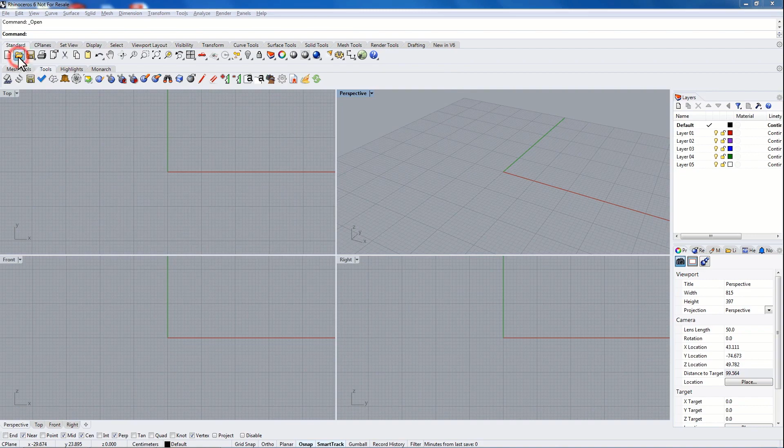ExactFlat is capable of reading many different geometry types. For this video we are going to import a step file that was originally created in SolidWorks. We will begin by clicking the Open button and selecting our headrest model, then clicking the Open icon to open the model. We're going to accept the default options and just click OK.

The first thing we notice about the model is that it's coming in upside down. If we rotate the perspective view around, we can see that the headrest is upside down. To correct this, we can use either the mirror command or the rotate command.

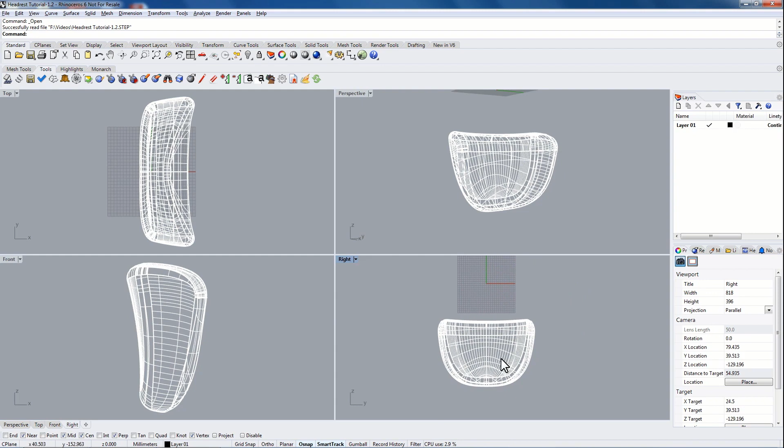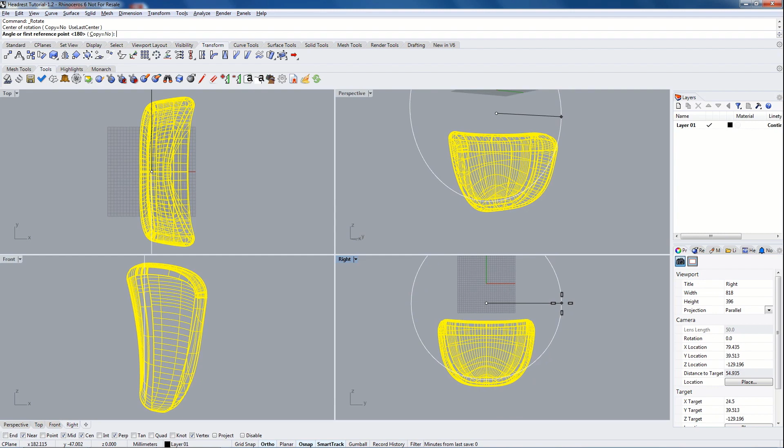We will start by selecting the mesh. We're going to go to the transform toolbar and use the rotate command to rotate this to the correct orientation. We will click an arbitrary spot for our center of rotation, and our first reference angle is going to be the horizontal x-axis. We will hold shift on the keyboard to snap our second selection point to be on the horizontal x-axis. We will rotate our second reference angle 180 degrees, and again holding shift we will snap our second point to the horizontal x-axis. Our object has now been rotated to the correct orientation.

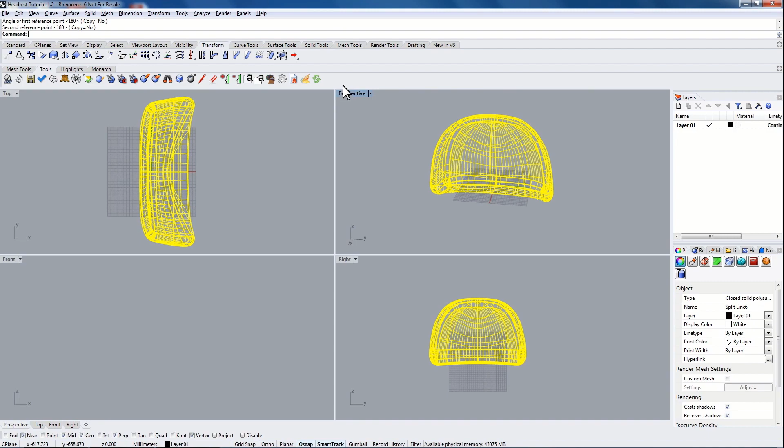We will now proceed by maximizing the perspective viewport. We will do this by double-clicking the viewport title in the top corner here. Now our viewport has been maximized, giving us the greatest viewing area for working with our model.

Our next step is we're just going to zoom to extents so we can see as much of our model as possible.

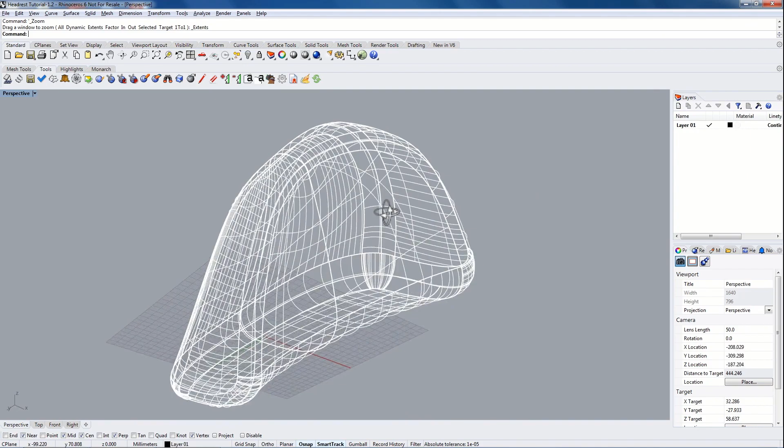Before we proceed, trying to work with this object in wireframe mode is a little difficult, and it doesn't give us a very good sense of the curvature of the object. So we're going to change our viewing mode from wireframe. We're going to right click on the viewport title to bring up our menu, and we're going to change our render mode from wireframe to shaded. This allows us to see the curvature of the model a little better.

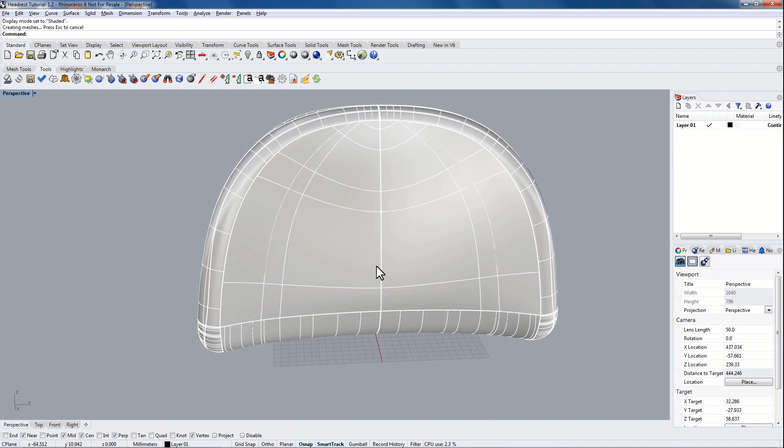Now when this model came in, it came in as a single polysurface object. Although ExactFlat is perfectly capable of flattening polysurface and surface objects, it is preferable to flatten a mesh object. This is because meshes give us the greatest degree of control and access to our suite of pre-processing tools, such as the adaptive and uniform remesher.

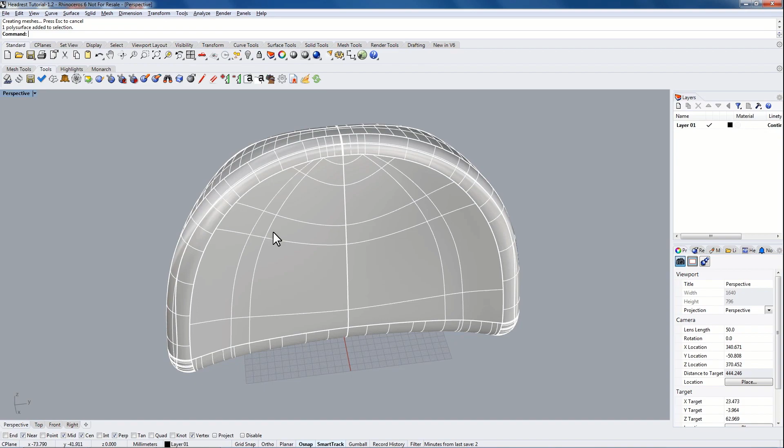As such, we're going to first create a mesh from this object. We will begin by selecting the object, then go to our Mesh Tools toolbar and use the Mesh command to create a mesh. For simplicity's sake, we're going to use simple controls and just create the most polygons possible. When done, we'll click OK, and soon we have a mesh.

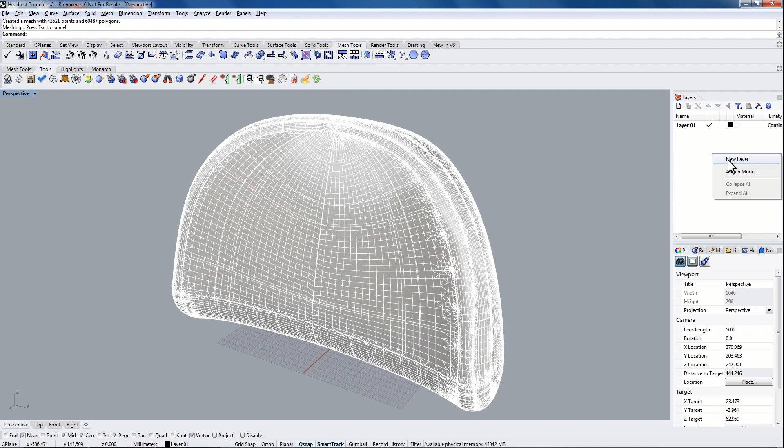To keep the model document clean, we're going to separate all the different geometry onto different layers. Instead of keeping our geometry in one layer, we're going to create a new layer. We'll do this by going to the Layers tab, right clicking in the white space, and selecting New Layer. We're going to give our layer a name of Mesh.

Next, we're going to select our mesh, and using the Object Properties dialog, we're going to change the layer from Layer 1 to Mesh. We are also going to change the display color from white to by layer, so that the mesh inherits the color of the layer and not just a white mesh.

Now we can make the Mesh layer the default layer by adding a check mark beside the layer name, and we can click the light bulb icon to turn off the polysurface layer.

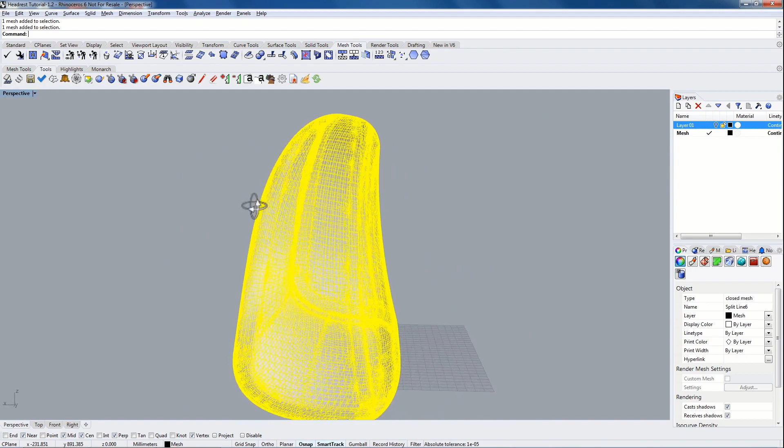At this point we have one single mesh representing all pieces. For this flattening job, we're going to create 4 different pattern pieces out of this mesh.

So we will begin by first exploding the mesh. To do this, we can use the Rhino explode command, or we can just type explode into the command line. So we will type in explode to explode this mesh, and it has exploded into 34 different meshes.

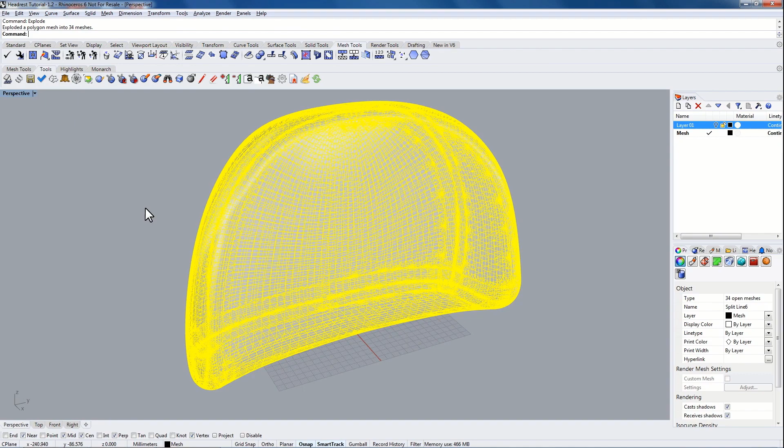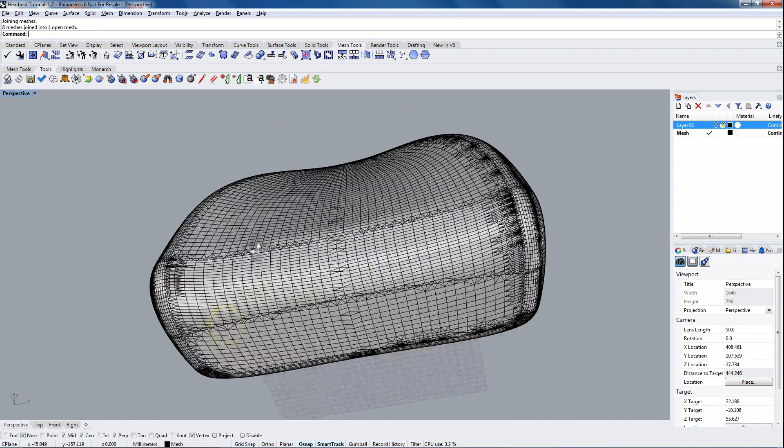From here, we can start to form logical pattern pieces by simply selecting them using the mouse. By holding shift, I can select multiple pieces, multiple meshes at the same time, and then we're just going to use the Rhino join command. So I will type join into the command line and press enter to join the meshes. We will repeat this process for all desired pieces.

So I've selected all my faces, and now I'm going to type join into the command line to join them together. We will repeat the process for the back. By holding shift, I can select multiple meshes and then type join into the command line to join them together.

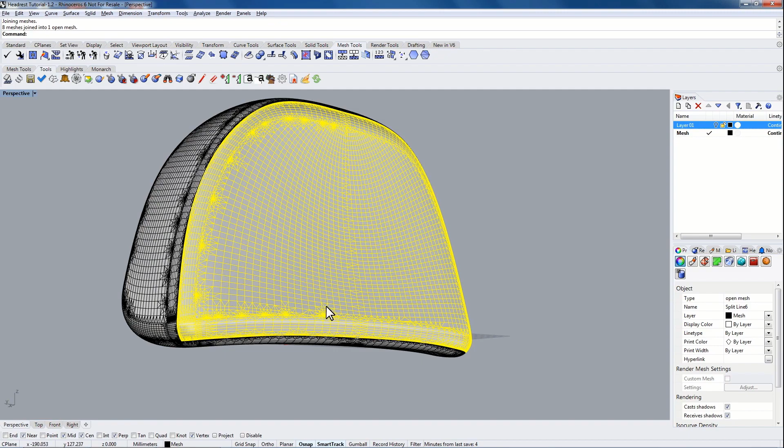For the last piece, instead of selecting all the faces, I'm going to select the 3 faces that I have already joined. Now I'm going to type invert into the command line to invert my selection. And now I can type in join to join these faces together.

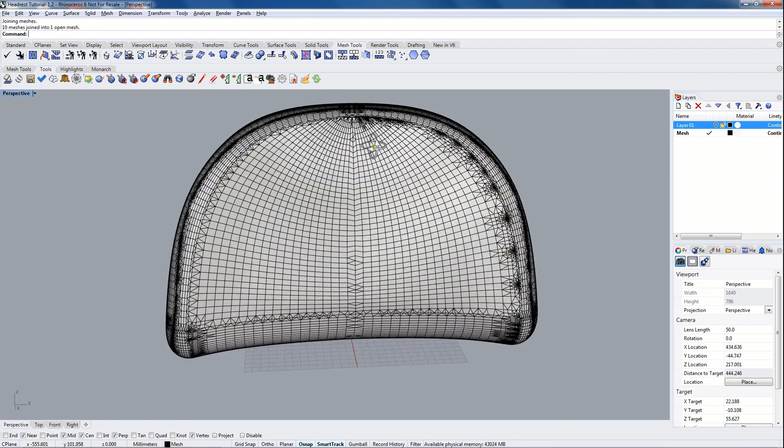By joining these faces together, we have created a single mesh that is comprised of many different sub-meshes. If we were to flatten this with ExactFlat, ExactFlat would recognize the sub-meshes and it would explode them for us back into our component meshes.

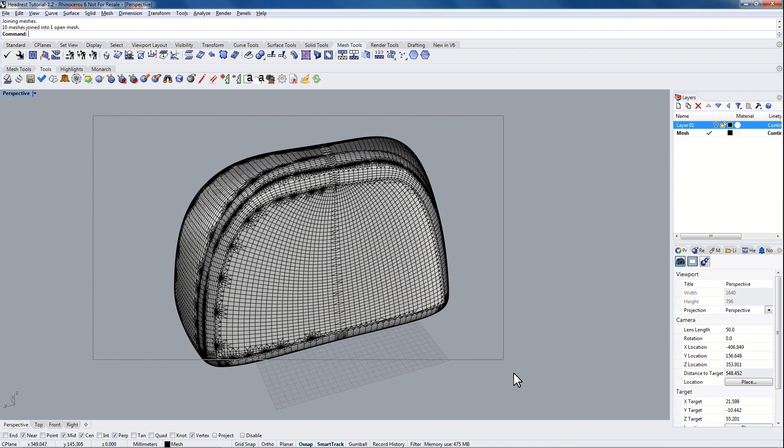To prevent this from happening, we are going to use the weld command to weld all the vertices together, basically reducing the coincident vertex count to 0. So we will start by selecting all our meshes and type in weld into the command line to weld them together. We're going to use a weld tolerance of 180 degrees, and pressing enter finishes the command. Now we have 4 mesh objects that we will flatten with ExactFlat.

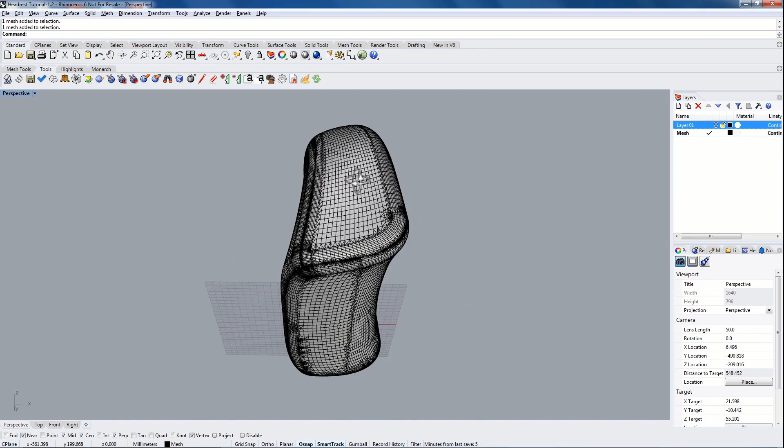Before we flatten with ExactFlat, we're going to use ExactFlat's mesh preprocessing tools to reduce the number of vertices of this mesh. As we look at the mesh, we can see we have a wide variety of triangle and quad sizes, ranging from fairly large.

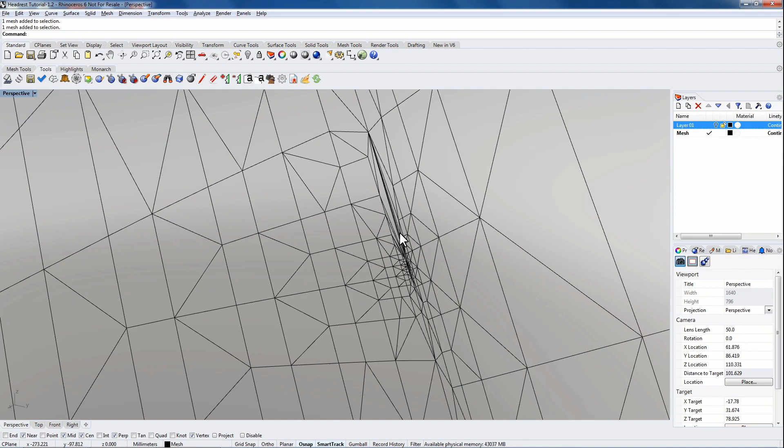If we zoom in, we can see some very, very small triangles here. We can also see what are referred to as high aspect ratio triangles, and these are triangles that have very small angles at one end, mixed with very large angles at another vertex.

Although ExactFlat can flatten these, they're not ideal for ExactFlat, and as such we have a couple different tools for pre-processing and conditioning these meshes, the most important of which is our adaptive remesher.

So we will select all our meshes and click the adaptive remesher icon to start the adaptive remesher. The adaptive remesher will automatically compute reasonable tolerances for sewing tolerance, desired surface, boundary, and minimum edge length, as well as use the most appropriate options.

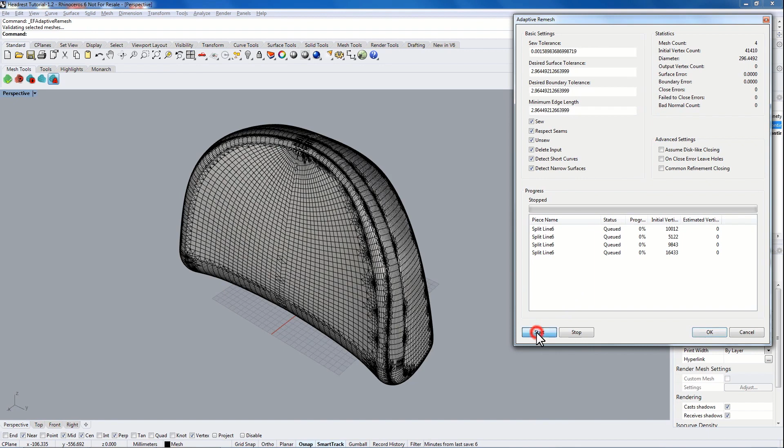So we're going to simply click the start button, and very soon we're going to start to see a new mesh created over top of the original. We're going to click yes to the high vertex count. We've got a high vertex count over 10,000 vertices, which is acceptable for ExactFlat when using the adaptive remesher. And very soon we're going to see a new mesh being created over top of the original.

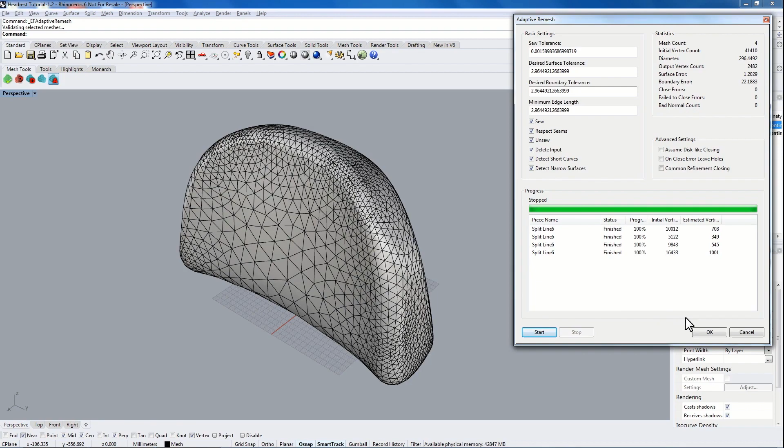A couple of the characteristics of this mesh are that all the triangles are more or less equilateral, and when there is a change in size of triangle, the change occurs gradually over a large distance.

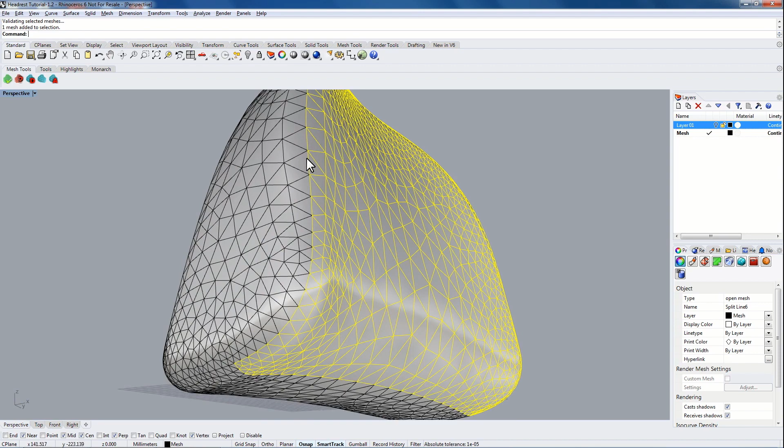We can also see that the edge tessellation has been preserved, so as we look at seams we can see that both sides of the seam share the same tessellation, that is, there's a single set of vertices along the edge that both right and left hand side share. All of these characteristics of the mesh make this a very suitable mesh for ExactFlat to flatten.

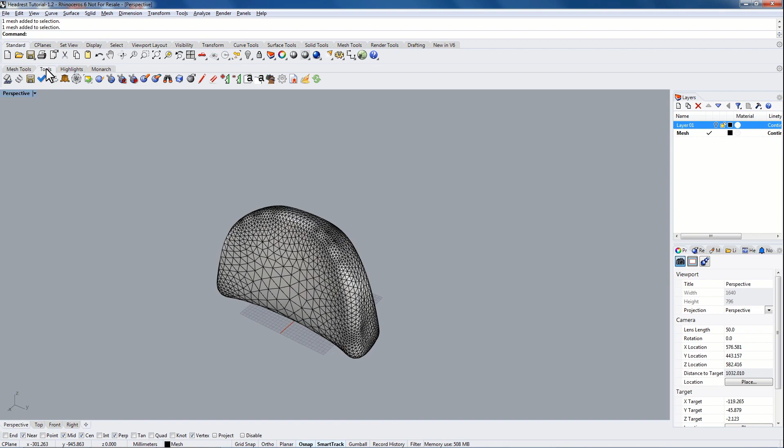After we've finished remeshing, we will change over to the ExactFlat toolbar and we will start to flatten these using the flatten command. We'll simply rectangle select all the meshes and press enter on the keyboard to accept the selection. And very quickly we can see our flat pattern.

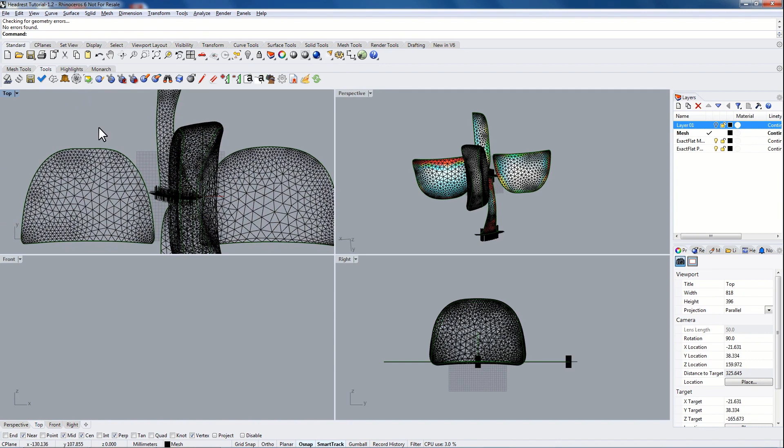For our next step, we're going to minimize the perspective viewport by clicking on the perspective title, and we are going to maximize our top viewport by double clicking on the top viewport title. We're going to switch from wireframe mode by right clicking on the top viewport title and selecting shaded.

And now, after flattening, we have 2 new layers created. One is the ExactFlat model layer, and the other is the ExactFlat pattern layer. We are going to make the pattern layer our active layer, and we are going to turn off the model and the mesh layer.

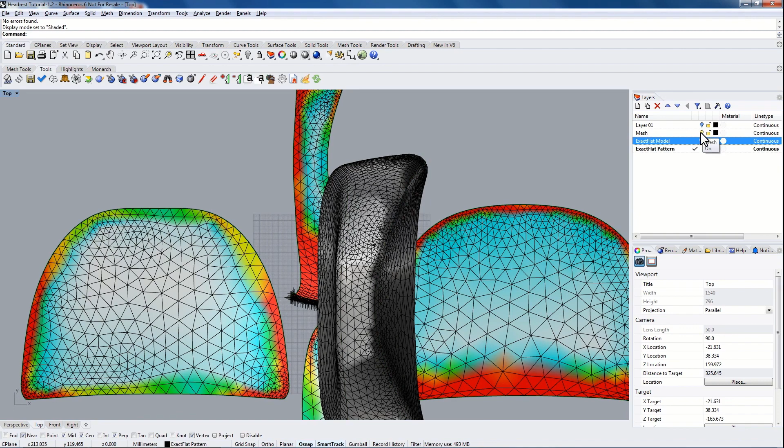It's important to note that ExactFlat is a 2-stage flattener, meaning ExactFlat does its flattening in 2 steps. The first step is what we are looking at now, and these are flattened using what are called pre-flatteners. Our pre-flatteners are a collection of different mesh flatteners that are very quick, but they produce meshes that are not optimized.

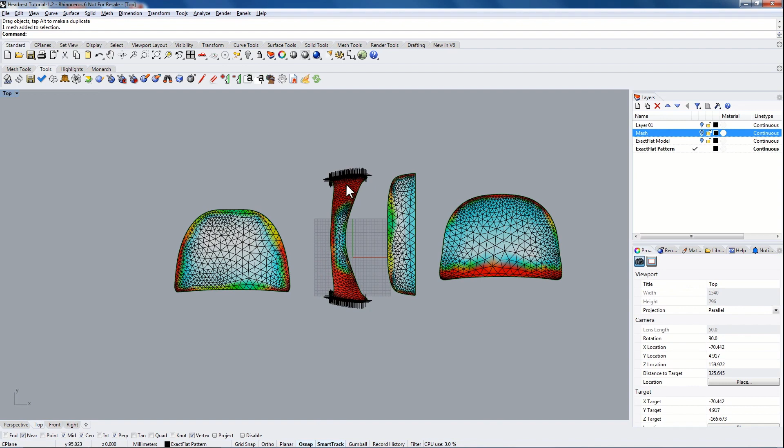In the case of this one, we have quite a bit of strain around the perimeter. For this piece here, we have quite a bit of strain, and the mesh is folded in on itself. This is the result of a projection flattening, and we have very similar results for the remaining meshes as well.

ExactFlat has a number of pre-flatteners, including our fracture pre-flattener, our pelt pre-flattener, and a collection of convex combination map pre-flatteners, as well as a number of pre-flatteners that are not actually featured in our toolbar yet.

If we select the fracture pre-flattener, we can select any edge on a mesh to act as a starting point for a new fracture. We can see the results of this fracture have both reduced the strain on the surface as well as expanded the pattern perimeter and eliminated a lot of the strain on this piece.

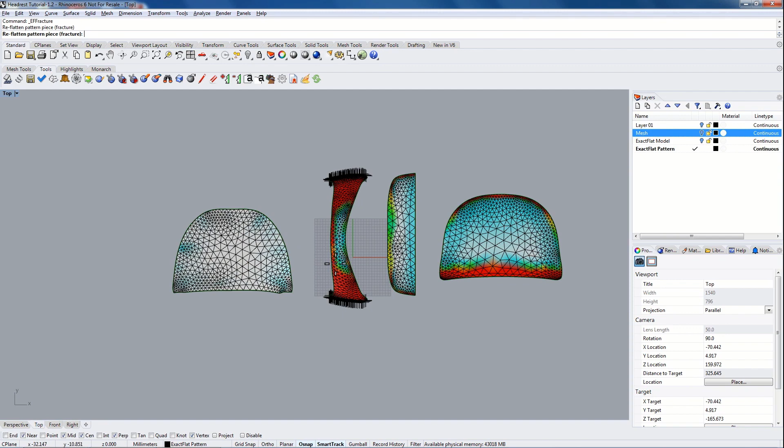When used on the second piece here, we can see that we've eliminated the vast majority of the strain. However, if we look at the corner over here, we can see a cross highlight which indicates the presence of flipped triangles or folds or wrinkles in the pattern. We'll use the fracture command on the remaining pieces, and our primary goal here is to eliminate a lot of the excess strain that's in the pattern.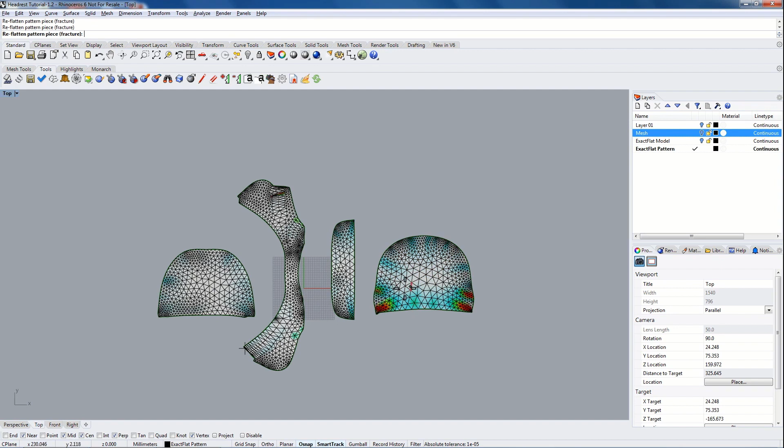We can try the pelt command on some of the pieces, and we can see that we end up with a slightly different starting pattern, although it is still unoptimized. In the case of this piece, we get a better starting position without flipped triangles, but this starting point has more strain in it.

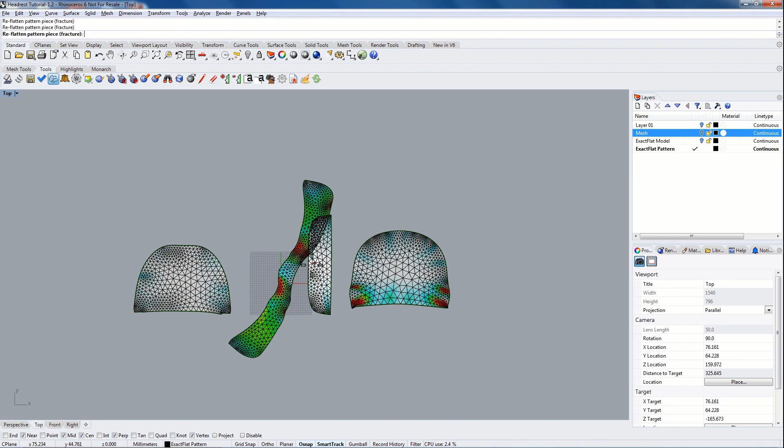The important thing to understand is that any of the pre-flatteners can be used at any point in time, and you can use them as many times as you want. This is just a result of the first stage flattening, and the second stage is always going to be optimized, and the optimizer is what's going to give us our final flat pattern.

The goals of using the pre-flatteners are to achieve a decent starting point for the optimizer that has minimal strain, such as this piece, and no flipped triangles. In the case of this piece, we can't optimize this piece yet because it has a flipped triangle.

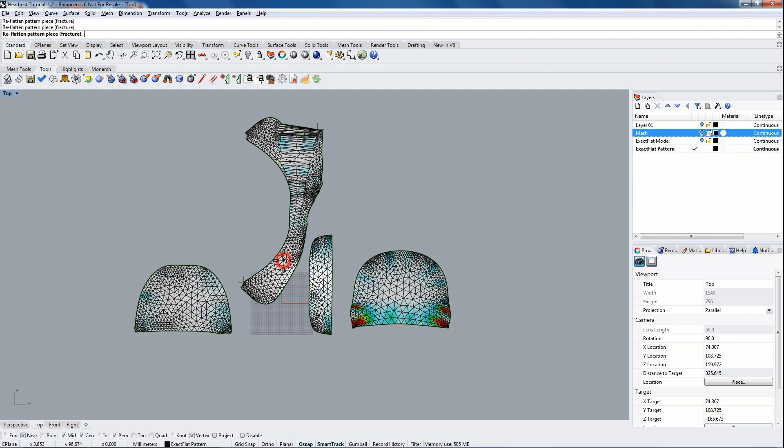The best way to correct flipped triangles are to either try a different pre-flattener, or in the case of fracture, we can try fracturing from different starting locations, and depending on the starting location, we end up with a different initial flat pattern that may or may not have flipped triangles. We can also try using ExactFlat's automated flip triangle removal process to remove the flipped triangles for us. And in this case, the process was successful and we no longer have any flipped triangles on this pattern piece.

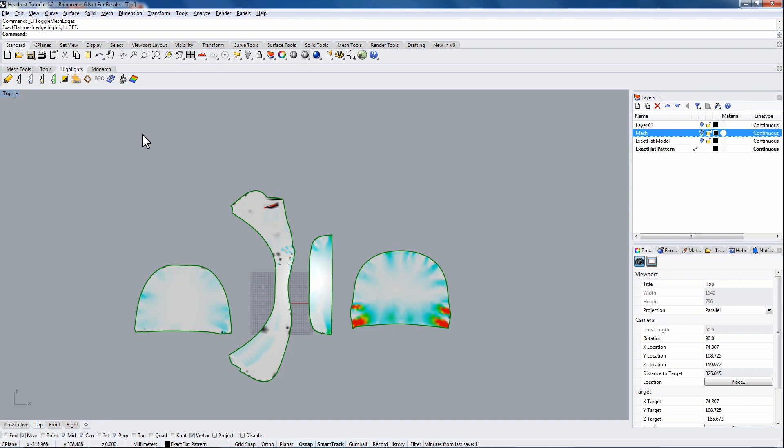It may be beneficial to turn off the ExactFlat edge highlight, and this will remove the triangulated mesh from the pattern piece, and we may also turn off the strain analysis. In the case of rendered textured objects, turning off the strain analysis will also allow us to see the texture of the object when in rendered mode. If the strain analysis is turned on, even if we are in rendered mode, we will only see the strain highlight. We will turn our strain highlight and edge highlight back on and go back to the tools toolbar.

Once we have a decent starting point for our flat patterns, we will use the ExactFlat optimizer to reduce strain and sag to as close to zero as possible.

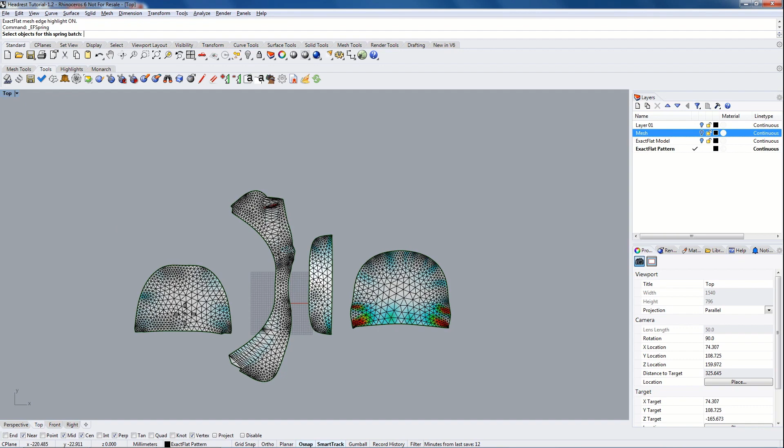For this demo, we're going to use a simple cotton model, and we're going to turn preprocess on to reduce our optimization time. Very quickly, the optimizer starts minimizing strain and sag and optimizing the pattern piece.

As the optimizer runs, we can see the shape is changing to better fit over top of the original 3D model. You can also see the strain highlight changing, indicating the strain throughout the pattern piece is changing. For most pattern pieces, this shift is going to be from red and green colors down towards white and cyan.

As with most parts of ExactFlat, the strain legend is very configurable through the ExactFlat options panel. By default, the strain analysis is configured so white represents 0% strain, cyan is about 5% strain, green is 10% strain, yellow is 15%, and red is 20% or more.

If at any point in time the optimizer reaches a point where the pattern is good enough and you just want to continue, we can click either the skip button to skip the current piece, or we can click the stop button to stop optimizing altogether. In this case, we click the skip button to skip optimizing this piece so we can proceed on to the next pieces.

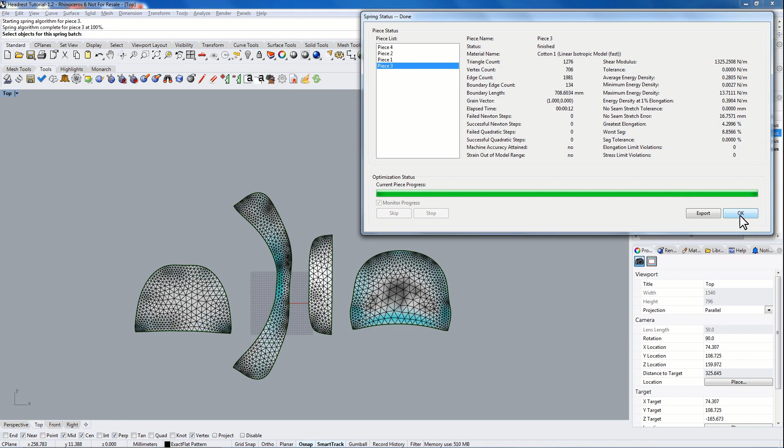After the optimization is complete, we can click the OK button to close the spring status dialog. And now we are ready to do our patterning of these pattern pieces.

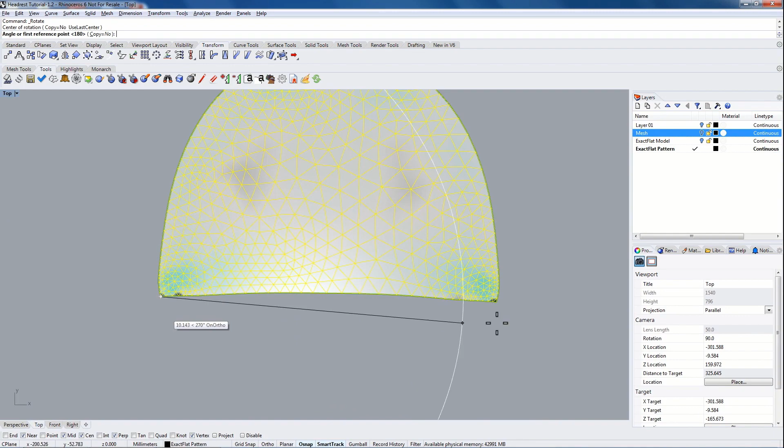To begin, we're going to rotate this pattern piece so the bottom edge is perfectly horizontal. And to do this, we will again use the Rhino rotate command. So we'll click the rotate icon in the toolbar. We're going to select the bottom edge as our center of rotation. We will select the other corner as our first reference point, and just holding the Shift key on the keyboard, we're going to snap this to the horizontal x-axis.

We are now going to use the ExactFlat Find command by clicking the binoculars icon in the ExactFlat Tools toolbar, and we're going to set a find offset of about 20 millimeters.

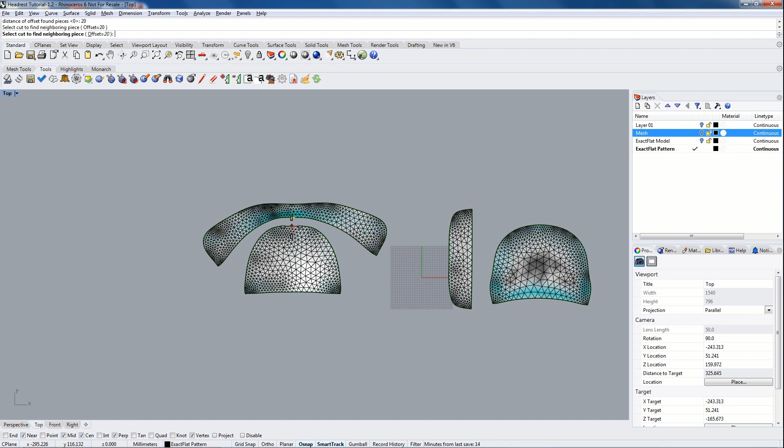As we click on edges and highlight over one of the edges, we can see the neighboring edges also being highlighted on the piece to the right. When we click on an edge, we see our neighboring piece is automatically translated and rotated to match the orientation of the selected edge.

Using this tool, we can very quickly rearrange the pattern pieces so they are much easier to work with in ExactFlat. This allows us to easily place notches on our pattern pieces, as well as identify any meshing or flattening errors that have occurred. Our next step is to add notches to the pattern, and notches are a combination of a text tag as well as either a slit notch or a V-notch.

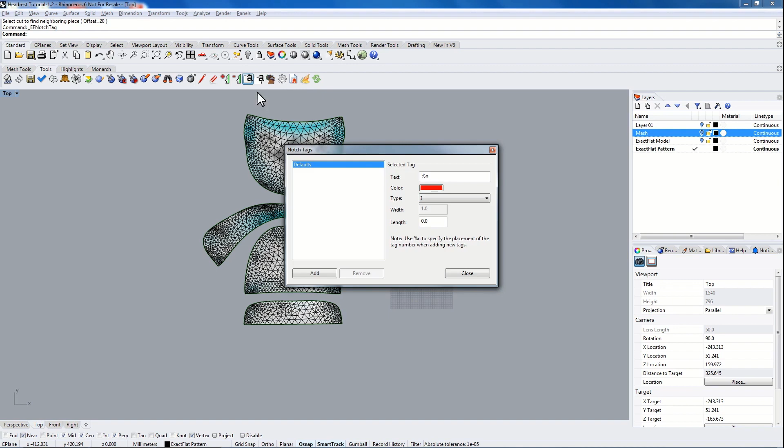Notches can be configured. We can change the color of the notch, change the type of the notch between I and V notch, and we can also manually adjust the width and length of the notch.

When the length is set to 0, the length is going to automatically be the length of the seam allowance added to our pattern piece. If we manually specify the length, then the length is always going to be however many units entered in the unit system that the document is currently using.

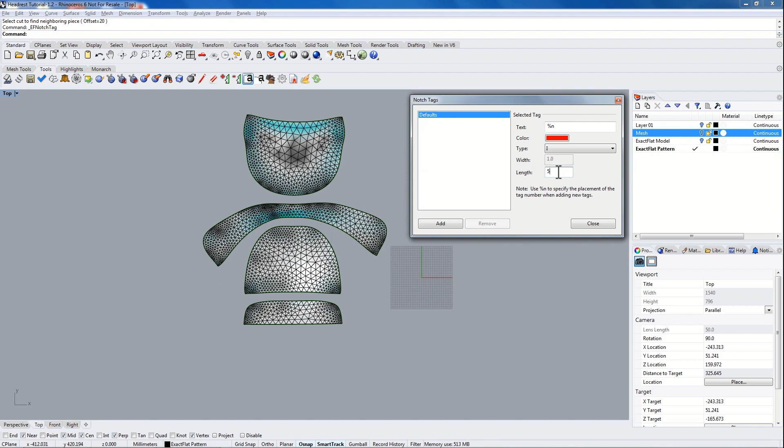In this case, we're going to specify our slit notch to be 5 millimeters in length. We'll click the Add button to start adding notches to this part. As I select edges on the pattern piece, we can see that the notches are showing up on the neighboring pattern piece as well.

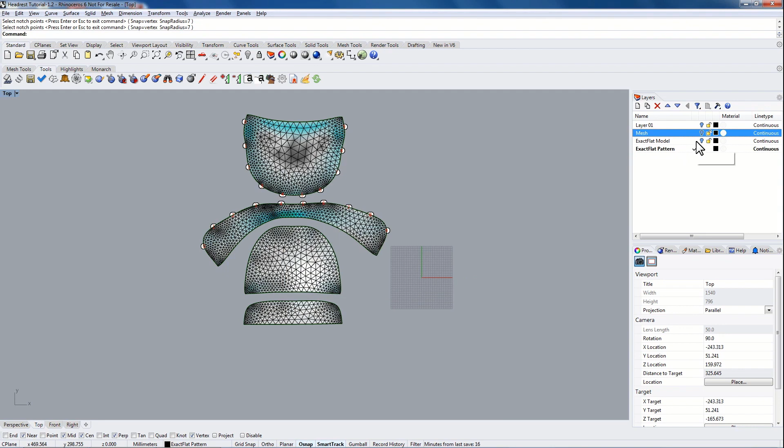We can also add notches to the reference model by simply switching back to our model layer. We'll make the model layer the active layer, hide the pattern, and minimize the top viewport by double-clicking on the top label. We'll maximize the perspective viewport by double-clicking on perspective, and now we can rotate our model around and start adding notches to the 3D model.

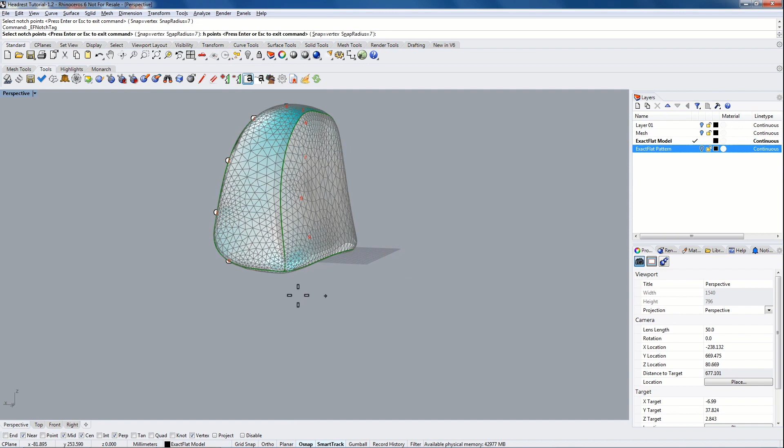We will again open up our notch tag dialog, and we'll click Add to start adding notches again. As we select our edges, we can see that our notches are showing up where we select. If we were to view our pattern again, we would see that the notches are being added to the pattern as well as the 3D model.

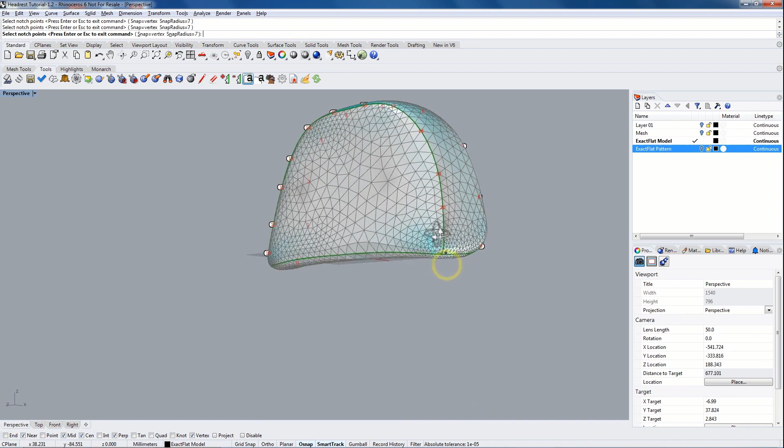The 3D reference model always represents the exact same changes made to the pattern and vice versa. So any change made to the model will be represented in the pattern, and any change made to the pattern will also show up on the 3D reference model.

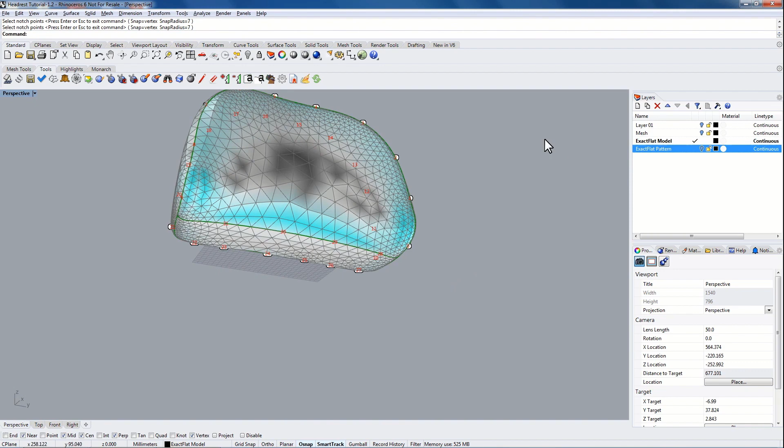Once all our notches have been added, we are ready to start creating a DXF. To do this, we will click the DXF icon in the ExactFlat Tools toolbar, and we will specify a DXF name.

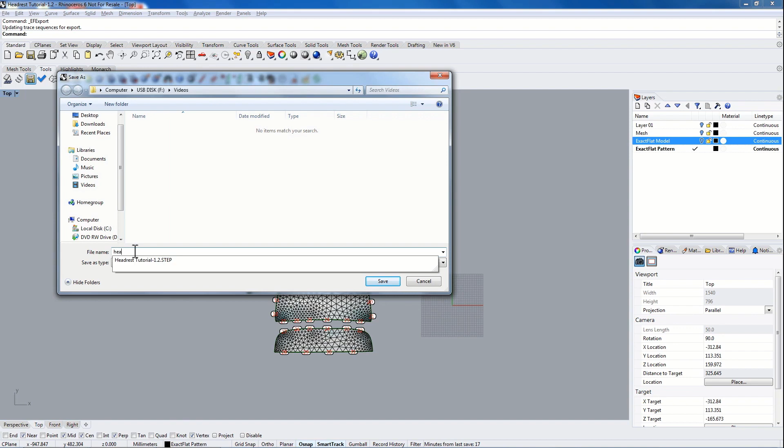We can use the import command to import the DXF back into the current document so we can have a look at the structure of the DXF.

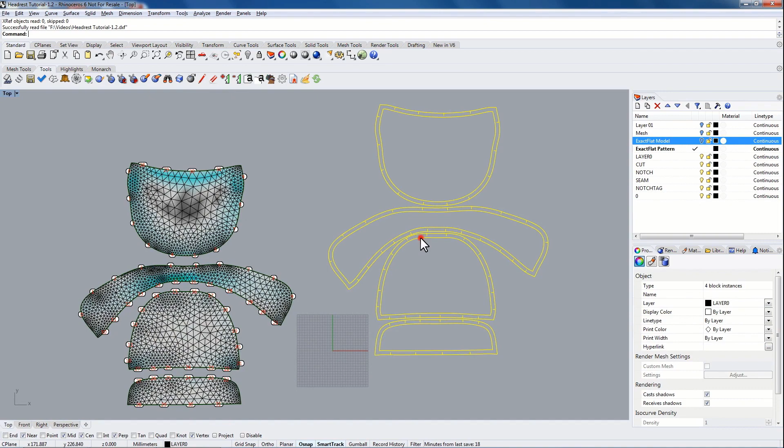As we zoom in, we can see that all the notches have been created where we specified them. We can also see that each notch has a tag added to it.

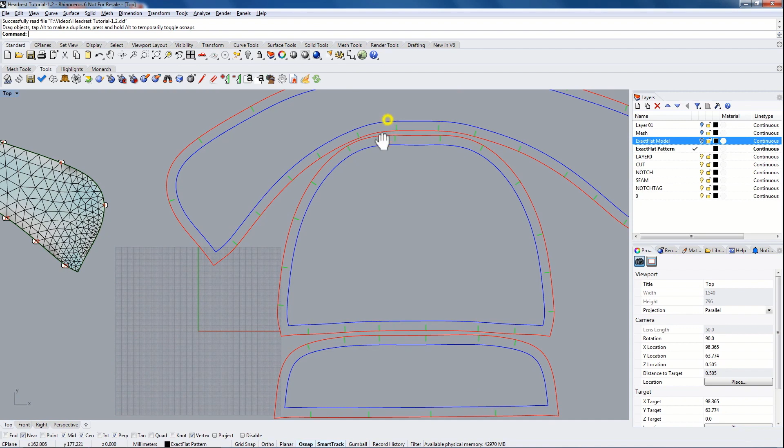When we start looking at the structure of the pattern, we can see we have a blue seam line, which represents the perimeter of the pattern piece, as well as a red cut line, which is the pattern piece plus an optional seam allowance.

The optional seam allowance is configured in the ExactFlat Options panel. If we move this pattern piece over top of the original mesh, we can see that the blue seam line matches the perimeter of the mesh.

Furthermore, if we start looking at the layer structure, we can see that all the cut lines have been created on a cut layer, and we can turn that layer on and off. All the seam lines have been created on a separate seam layer.

All the notches have been created on a separate notch layer, and the tags themselves have been created on a separate tag layer. So if we zoom in and turn the tag layer off, we can see the text disappearing.

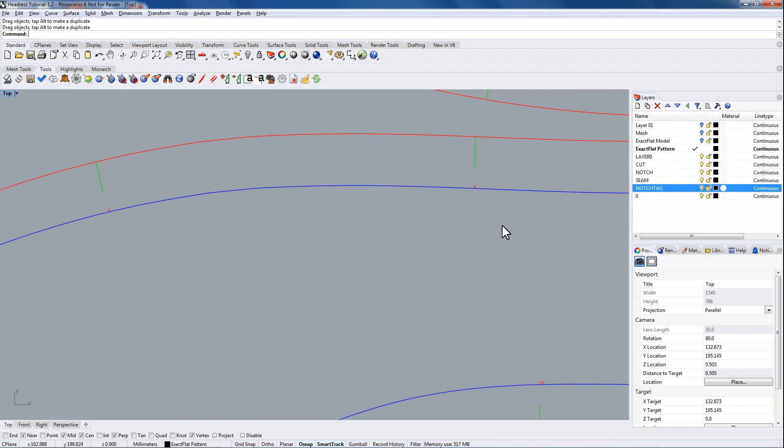This is important because when we bring this over to a cutting table, we can change the layer names, and we can also turn individual layers on and off. This allows us to very easily assign different tools, whether it's a cutting tool or a pen tool, to the different layers.